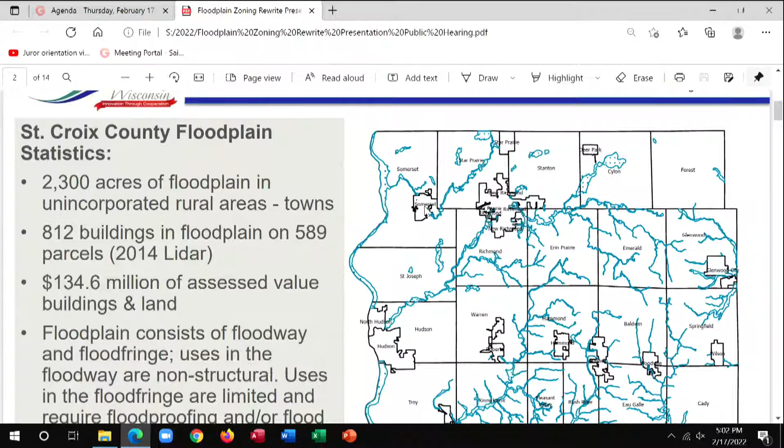Got it right there. Okay, so this is our Chapter 18 Floodplain Zoning public hearing. I'll give you brief information about floodplain in the county. There's approximately 2,300 acres of floodplain in the unincorporated rural towns of the county, and approximately 800 buildings that show up through our aerial photography and LiDAR. This land is valued at $135 million for buildings and land.

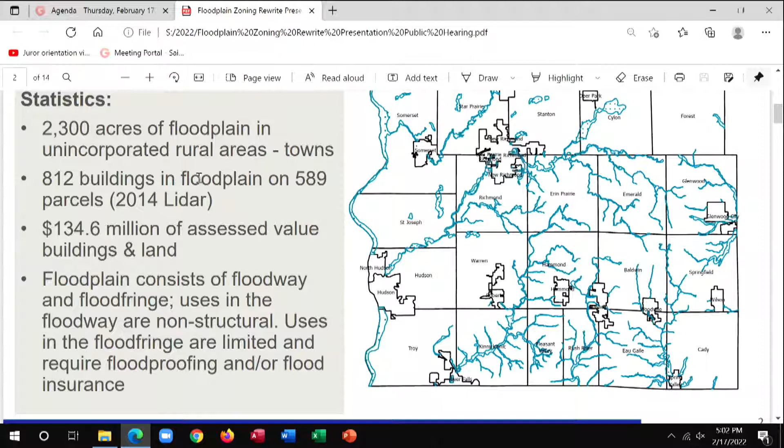The floodplain actually consists of two types: floodway and flood fringe. Uses in the floodway are non-structural. Floodway is really the river channel, not the areas that expand beyond the channel. The flood fringe is the areas that get flooded beyond the channel. Uses in the flood fringe are limited and require flood proofing and/or flood insurance.

Our ordinance rewrite objectives are to repeal Chapter 17.40, the Floodplain Overlay District, and recreate it as a separate Chapter 18 that complies with the Wisconsin Department of Natural Resource statutory changes and language in the model floodplain ordinance. The DNR works with FEMA to create a model floodplain ordinance. When FEMA makes changes, the DNR updates the ordinance.

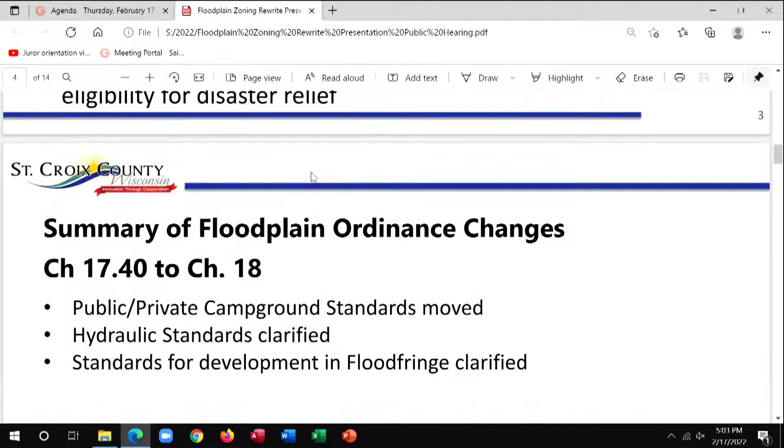We want to improve our CDD staff interpretation and consistency, and also formatting with our Chapter 15 and Chapter 16. It's important that we have a modern floodplain ordinance for continued participation in the National Flood Insurance Program and eligibility for disaster relief. So I'll quickly give you a summary of what's different.

Public and private campground standards were moved from the floodway district to the general standards. They're still allowed in the floodway and flood fringe, the same as in our current ordinance and as DNR requires. We just moved where they're at in the ordinance so it was consistent with DNR and other counties. Hydraulic standards were clarified.

Some standards for development in the flood fringe were clarified. For non-conforming uses, we added language about expanded definitions and modifications. I'll get into that. Variances for non-conforming structures in flood fringe were removed.

We had some language in our old ordinance to allow a variance for a smaller property, and that is not in either FEMA or DNR. We clarified variances on lots less than a half acre. In our existing ordinance, we said variances could only be done on lots less than a half acre. We removed that because a variance could apply to a larger lot.

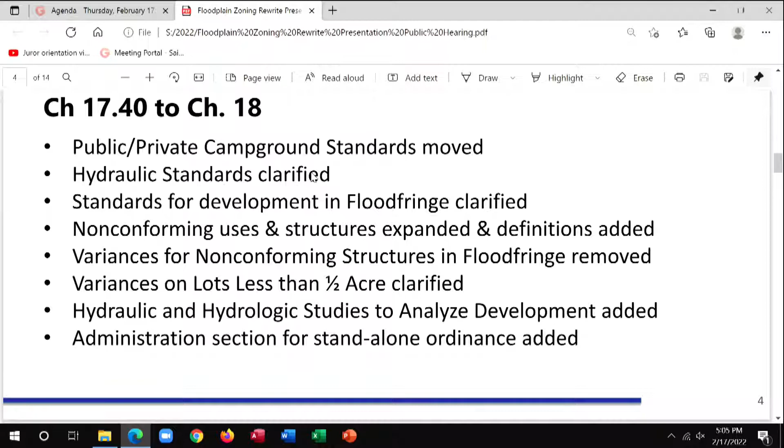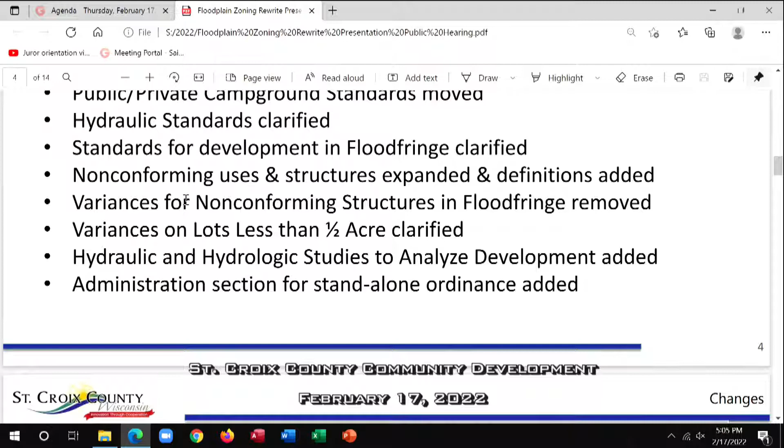A half acre is really kind of a standard, though, and something we should be looking at when we allow variances, or the Board of Adjustment should be looking at. A large thing that was added was hydrologic studies—a large section was added for that—and we've added an administrative section for our standalone ordinance.

So I can just go through some of these changes. The public and private campground change I already highlighted. These hydraulic standards we had in our ordinance allowed for 0.01 feet of increase, and the language was causing any increase. So if we wanted a hard number there, it would be 0.00, no increase. That was a change required by the DNR.

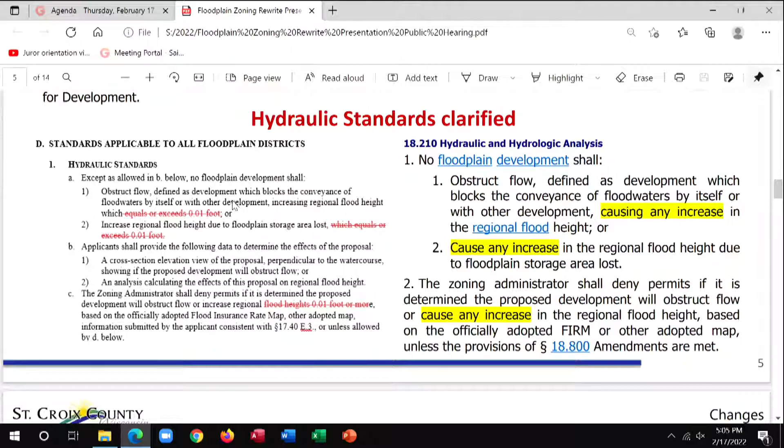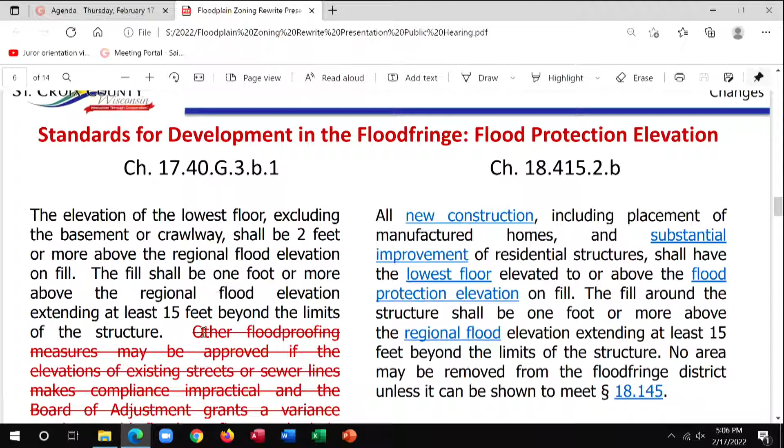Standards for development in the flood protection elevation: we had language that other floodproofing measures may be approved if the elevations of existing streets or sewer lines make compliance impractical. That was taken out—it does exist in another spot in the ordinance, though, but it was just clarification.

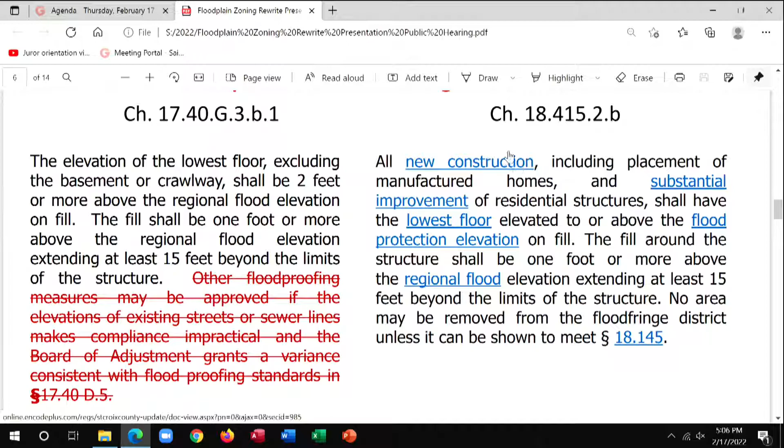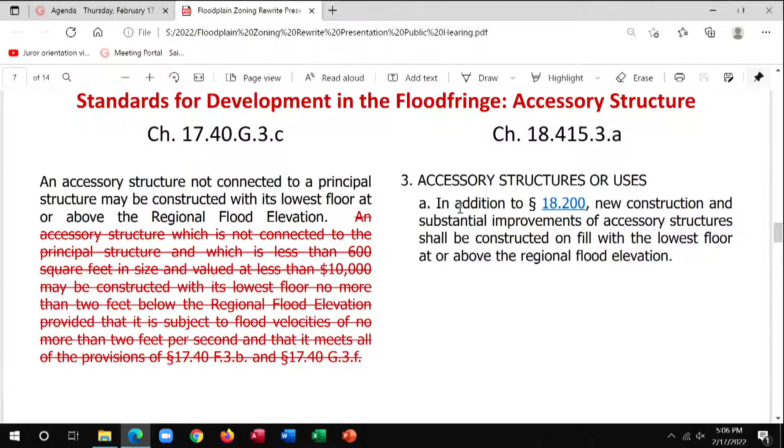Accessory structures - we had an allowance for an accessory structure not connected to the principal structure, less than 600 square feet and valued at less than $10,000, which could be constructed with its lowest floor no more than 2 feet below the regional flood elevation. That was for a very small accessory structure, and it was removed by the DNR's review of our ordinance.

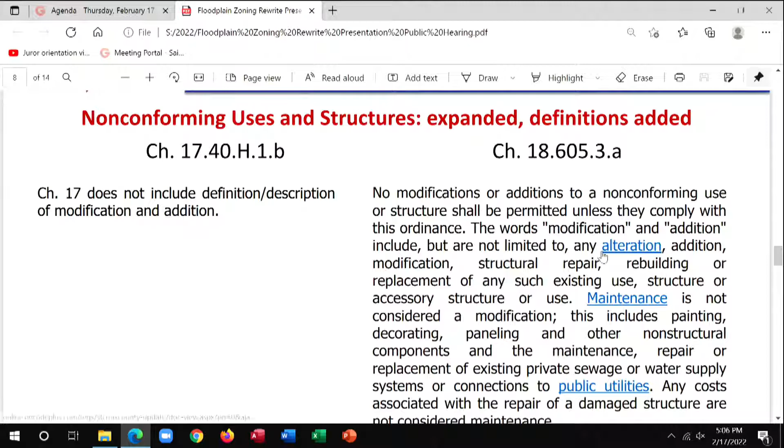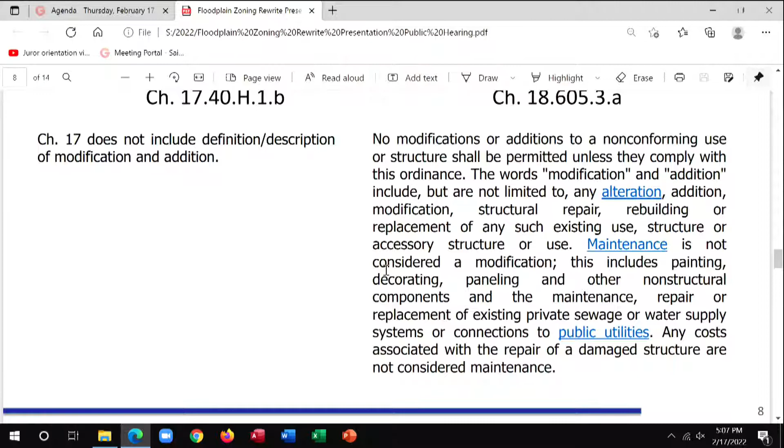Non-conforming uses and structures had expanded definitions. The words modification and addition were added to our ordinance, or expanded - alteration, maintenance - and we had to further define what those meant within the body of the ordinance versus just the definition section. We did not include that definition in our Chapter 17.

Those are important when we analyze the structure for additions beyond 50% of the value, so you can't do additions or modifications associated with value.

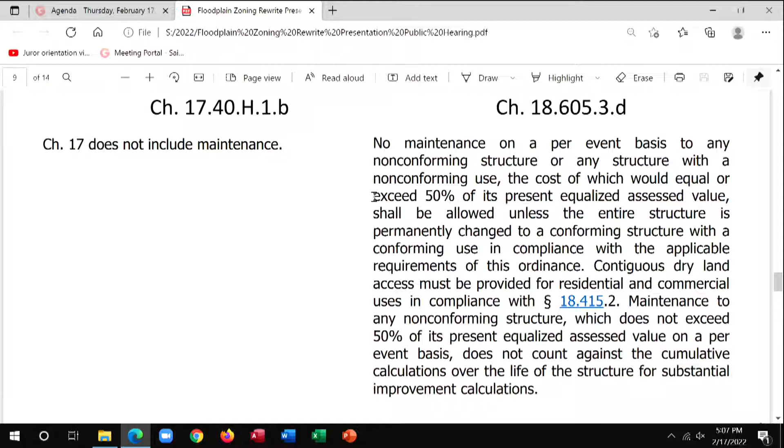Our current ordinance, Chapter 17.40, did not include a section on maintenance, so there's a lot of information here about maintenance - no maintenance on a per-event basis to a non-conforming structure, or any structure with a non-conforming use, the cost of which would equal or exceed 50%. This is important because it actually defines maintenance. Painting, decorating, paneling - those are different than major alterations. So those are important additions from the DNR.

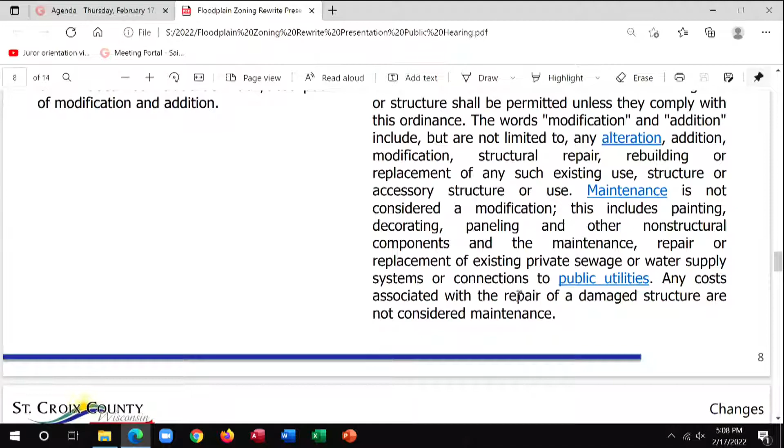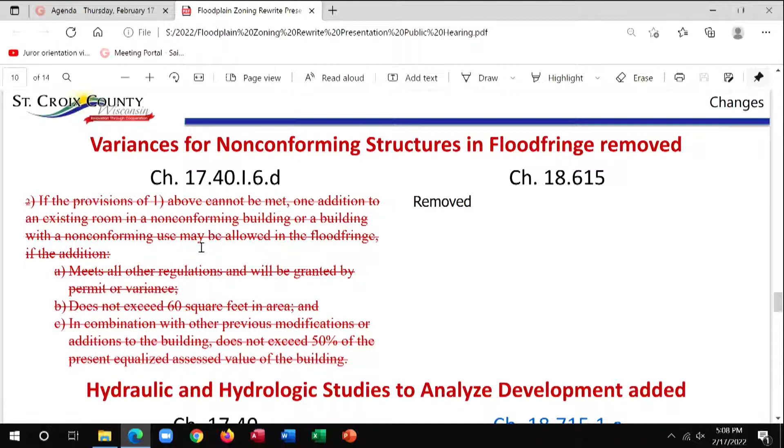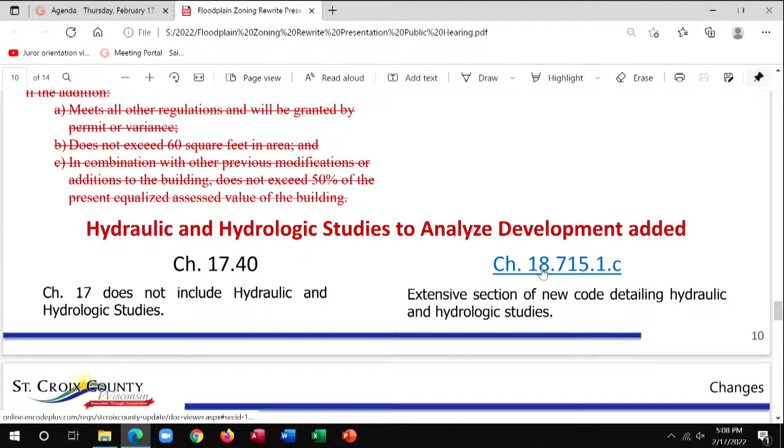We had a large section for hydrologic studies - I'm going to skip past this. I didn't want to put this into the presentation because it's a long section, but just to give you a taste: hydraulic and hydrologic studies, going into a lot of detail about hydrology, hydraulic modeling, the different types of analysis needed for different flood zones and different models. Quite an extensive section added that is in the DNR model ordinance.

Back here, back, thank you.

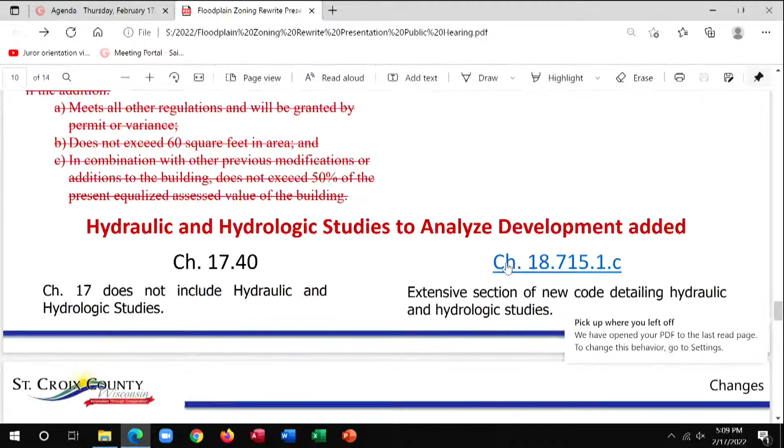Variances on less than 1/2 acre were clarified. In our existing ordinance, we had a section stating variances can only be granted for lots less than 1/2 acre and contiguous to existing structures constructed below the regional flood elevation. We've now removed that, because those variances could be allowed in extra special circumstances on lots greater than 1/2 acre as well. So that was a change to our ordinance.

We also added some information about the expiration of permits and variances, again to match the DNR model and FEMA.

Additional information was added noting that adjustments may increase risk to life and property, and flood insurance premiums could increase up to $25 per $100 of coverage. In our existing ordinance, we just said it may result in increased flood insurance premiums - we had to specifically define that like statute did, and we also did that for penalties and enforcement.

So that's a quick overview highlighting the changes. The next steps would be county board action, hopefully. Then Chapter 18 floodplain goes into effect upon county board adoption. We send a certified copy of the ordinance to the DNR for final review and get a formal approval letter from the Wisconsin DNR, and the DNR sends a copy to the Federal Emergency Management Agency, FEMA.

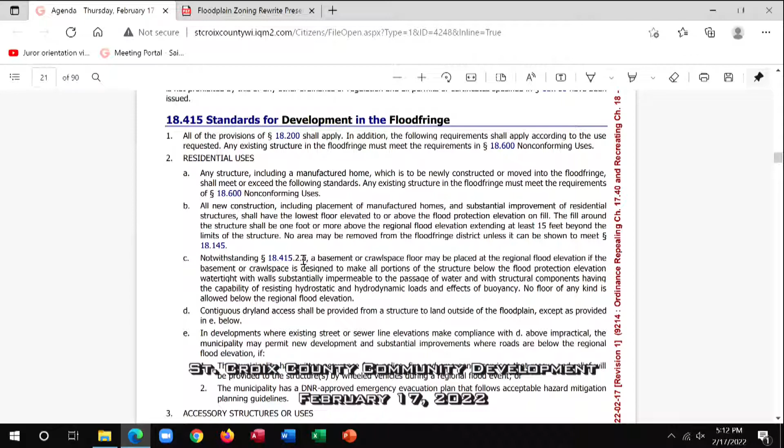Thank you. Sir, did you come to make a comment regarding this? Very good. Welcome, glad you're here.

Then we'll close the public hearing at this time, and we will move into our business items.

Well, let me ask one thing before I go into the business items - I forgot to open public comment, I didn't turn my head far enough. Did you want to say anything at all, sir? Because you're the only member of the public here. I'll just give you a chance to say hi. All right, here ends public comment.

Moving on to business items. Number 1, an ordinance repealing Chapter 17 and recreating Chapter 18 to the county board. I'll entertain a motion.

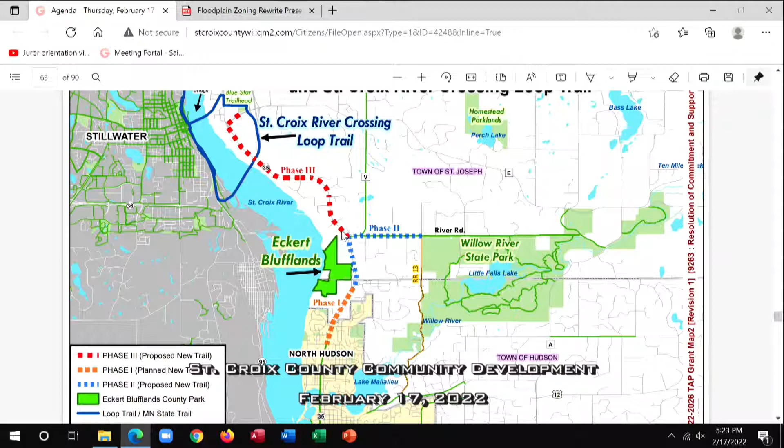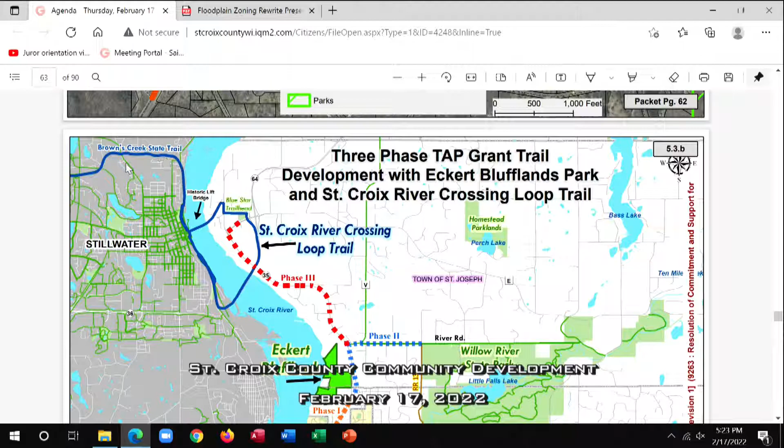So the resolution tonight would commit the county to endorsing this project, and also to funding it. The future Phase 3 would get us up to the St. Croix River Crossing Loop Trail, where it would access the bridge crossings, either the historic lift bridge or the new bridge crossing. The blue shows existing trail, which would connect into the Twin Cities via the Browns Creek State Trail.

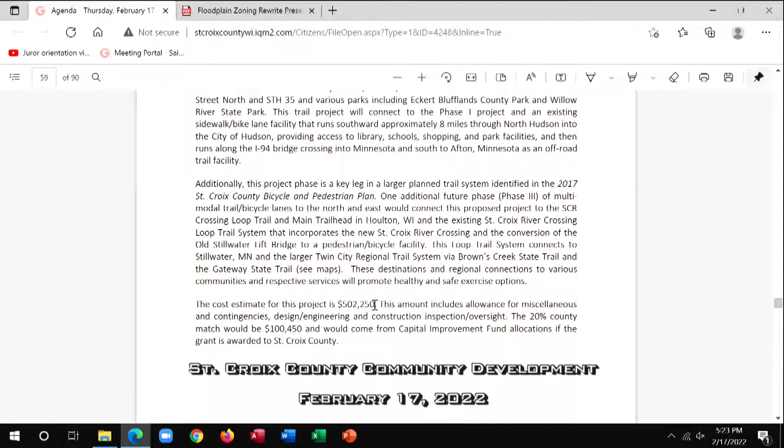Going back to the memo in your packet tonight, the cost estimate for this project was $502,250. The 20% county match would be $100,450. Here's the draft resolution we would send in, pending county board approval next month.

Any questions from the committee? Judy: Out of curiosity, where is the money going to be coming from - out of community development, fund balance, or where?

The CIP has primarily been funded through fund balance transfers, so that's where it should be coming from - that's where we plan on funding it from. Is it currently in the CIP, or will it be a project we add? The project is several years out, but just like the previous one, the resolution states that matching funding would only be allocated in the CIP if the grant is awarded. That's what we usually say in all of our resolutions, if we have a pending or hoped-for grant application out there.

This is a more detailed map with some aerial photography. Everything in red would be the 10-foot off-road trail facility. It comes out to County Road V, follows County Road V for a bit, and once it hits River Road, we transition to an on-road bike trail with striping, taking us to the edge of Willow River State Park at the Trout Brook Road intersection.

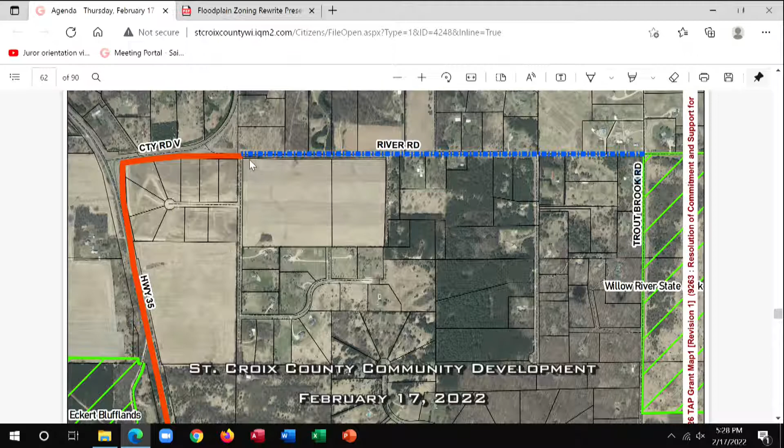All right, can we get a motion please? I'd make a motion to approve the resolution of commitment and support, on page 60 I believe. Page 60? No, it's only 2 pages. What page do you have? My numbers are off, 60 and 61. Yeah, page 60, back at page 60.

So somebody needs to make the motion. It's working on it, but I can read it. Do you want me to read it? Nope, just move. So it was on page 61? Well, 60 is a resolution, yeah. And we don't know the resolution number yet.

So I'd make a motion to approve or recommend to the county board the resolution of commitment and support for the Wisconsin Department of Transportation, WisDOT, 2022 through 2026 Transportation Alternatives Program grant application to construct the Highway 35 off-road trail Phase 2.

Do we have a second? Second. Very good, any further conversation? Seeing none, all in favor say aye. Aye. Any opposed, same sign. Motion passes, thank you very much. Thank you, John.

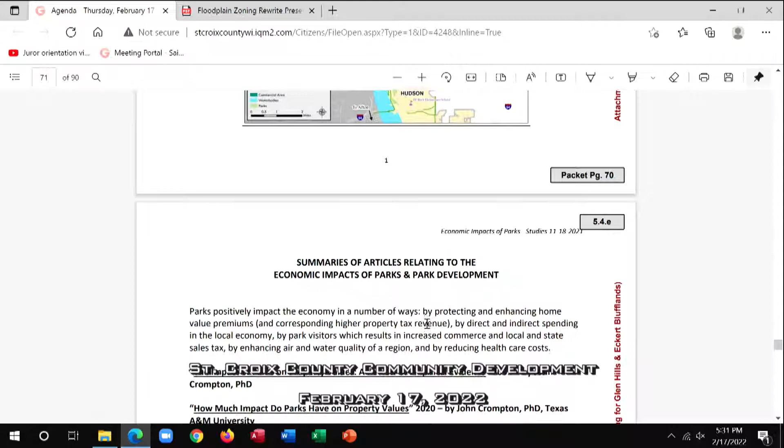Thank you. So that being said, this is put on the agenda so that we could have an opportunity to talk about this in public in a transparent way.

What do we want to do next? It's sort of an open-ended conversation. A couple of committee members said, what are we doing? How are we going to raise funds? What's the next step? And I thought it would be a good idea, as Ellen said, this is what I can do. I can put together the information, put it in the packet, and let you hack it out, talk about it, and see what you think.

So that's what we've done. I've read through this, and everything that's here is what we've talked about before. And I wanted to get your ideas of what our next steps are going to be, because we need $1.6 million for camper cabins in Glen Hills. We need at least $10 million to get going on Eckert Blufflands, and that's just for phase one. I'm just wondering if my colleagues here have any thoughts on what our next best steps are going to be.

You're going to have a new board, so it's going to all have to be explained again, and you've got to emphasize, in my opinion, the increase in usage, and that the best way to make money is to spend money, which is ironic. But if you want people to go to the parks and use them, you're going to have to make them attractive, so that people want to use them.